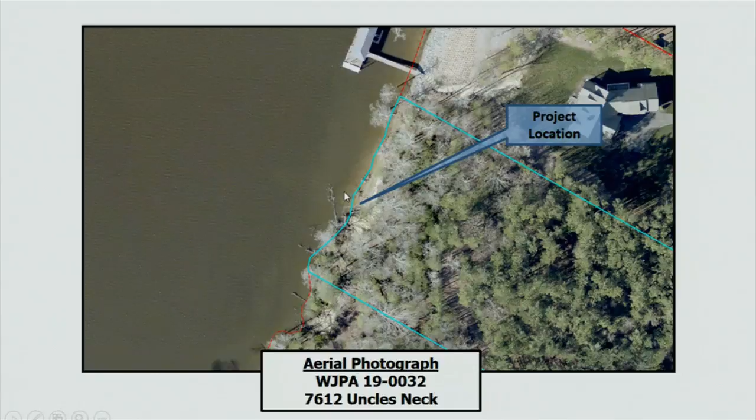Aerial photograph showing the approximate location of the beach nourishment with breakwaters occurring here in the water. Topography indicating the steep nature of the bank with excessive erosion occurring on it, and the floodplain as it occurs on this property.

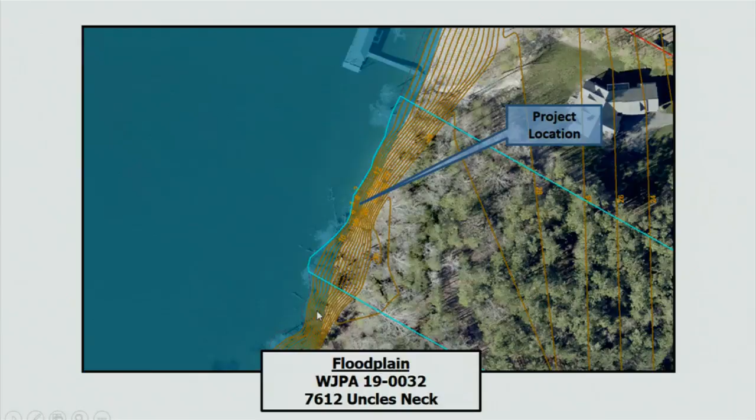This cross section of the beach nourishment and breakwater shows the essential project limits.

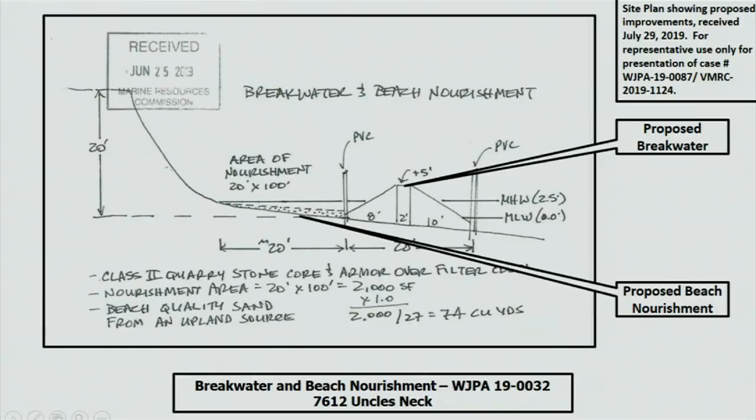Some site photographs, approximate area of the beach nourishment. Here you can see a snapshot of the extensive erosion on the bank as the current conditions lie.

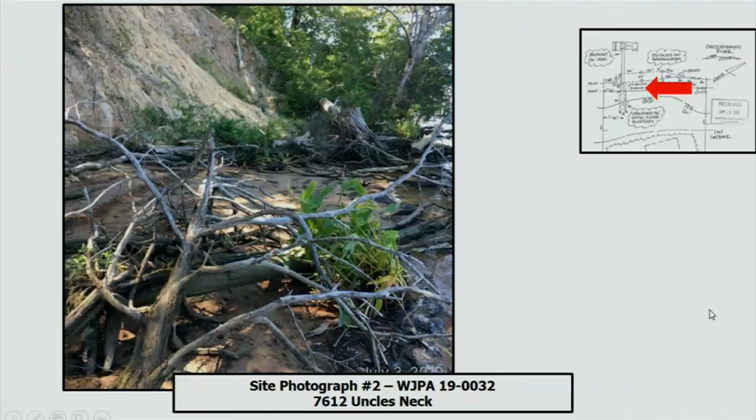This is part of the breakwater, I believe. Further out, also this PVC pipe indicating the breakwater, and this one here also with vegetated wetlands occurring here.

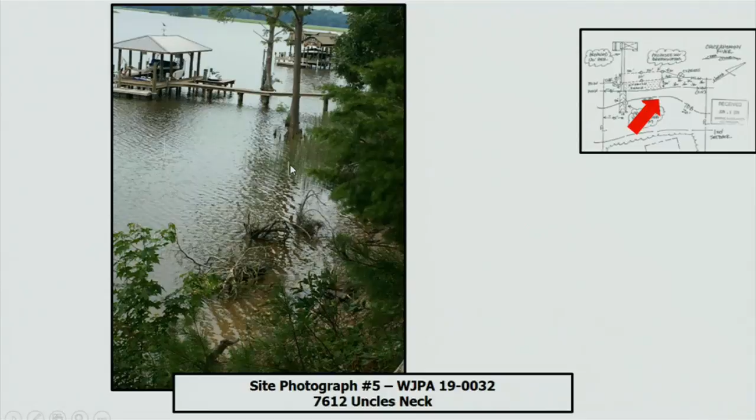From the upland bank, looking down on the vegetated wetlands, here's PVC pipe. And looking towards the project as a whole, very well illustrating the erosive nature of the bank and need for beach nourishment and a breakwater.

Again, staff does recommend approval of this project, given that all other necessary federal, state, local permits are required for the project. That a surety in the amount of $450 shall be required to guarantee the no net loss of wetland policy and the mitigation plantings.

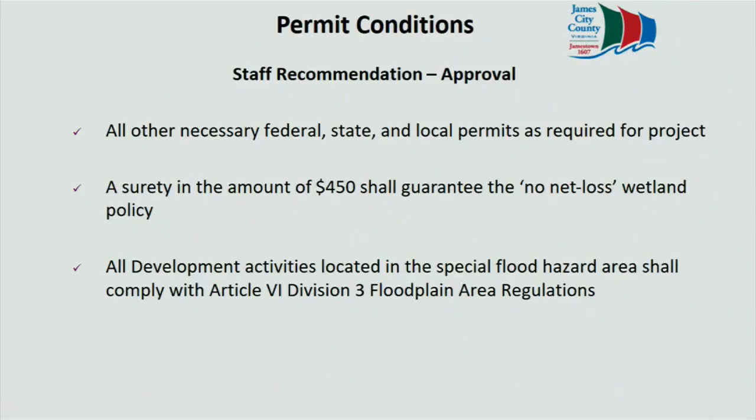That all development activities located in the special flood hazard area shall comply with Article 6, Division 3 floodplain area regulations. That the wetlands permit for this project shall expire on August 14th, 2020 if construction has not begun, with a request for an extension to the permit written and requested no later than July 3rd, 2020.

I'd be happy to answer any questions that the board may have at this time.

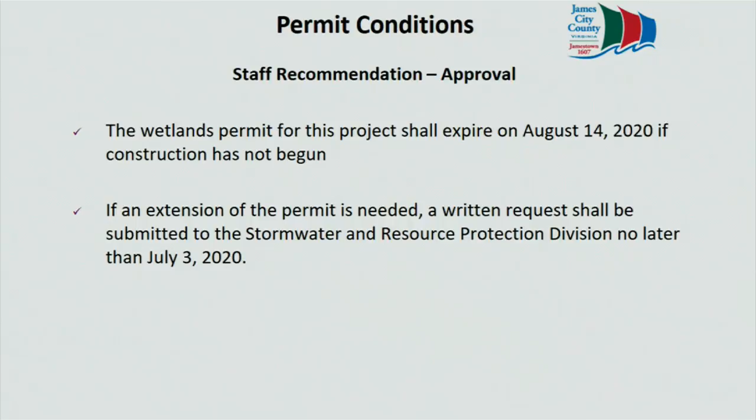Questions? I have one. Are they going to put a pier or access to the breakwater? Access to the breakwater? Yes, or over elevated access so they can walk, put a boat out past the breakwater.

Yes, they will. And the pier will be located right here. And access to the pier will be heard before the board in the Chesapeake Bay portion of this meeting.

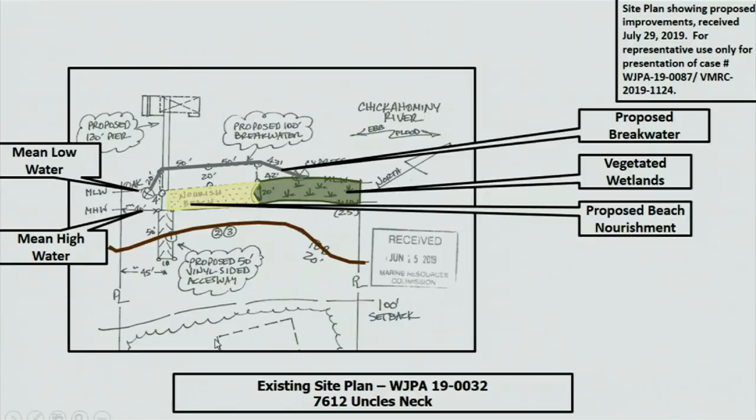So the portion of the pier that's going over, will not be going over the wetlands, and that area is not being considered when you compute the whole amount of wetlands that will be planted. Is that correct? That is correct. Okay, thank you.

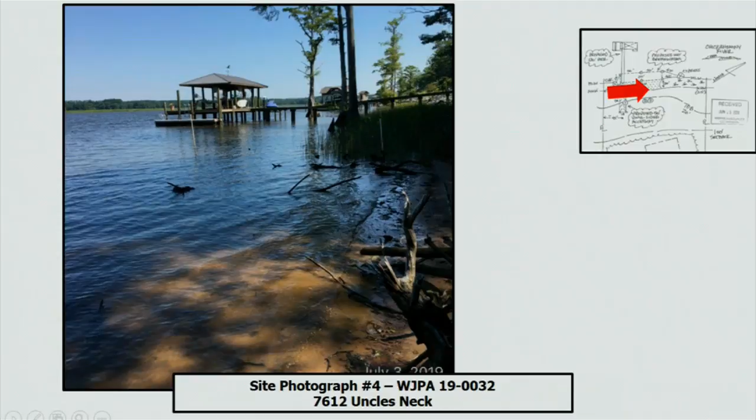The concern that I had is that the application as presented shows 2,000 square feet of subaqueous encroachment. Clearly, because of the vegetated wetlands, there's an intertidal component here. So are we saying that was the 70 or 30 feet, 30 square feet? I don't know the answer to the question. There's a little bit of a conflict between what the application states and what we're seeing.

When we went out and looked at this, I believe we went out at lower tides, however it may have been slightly higher, and we calculated that number at about 30 feet. We were a little unsure with the PVC placement as to where the breakwater would go, so on the assumption that it went further into those vegetated wetlands, we chose a safe number of 30.

As staff, we would like to put it out there that if we could amend the conditions so that mitigation plantings or surety could be determined closer to the time of construction - we saw vegetated wetlands come up when staff went out, but not when the applicant came out - so if that would be something the applicant would be interested in, staff could be amenable to that. So determine the mitigation requirement just prior to construction, based upon the presence of vegetated tidal wetlands. Thank you.

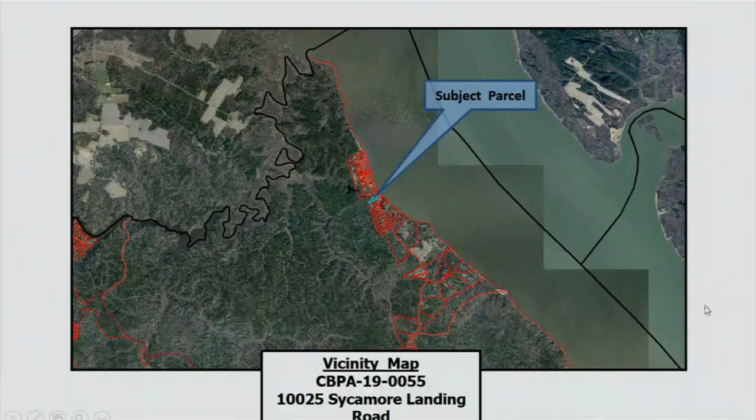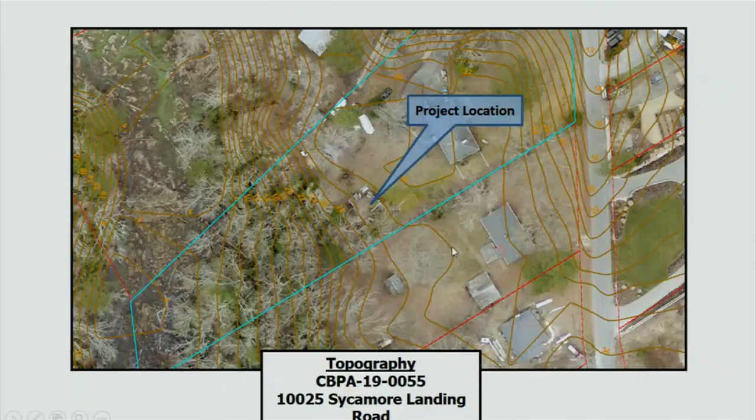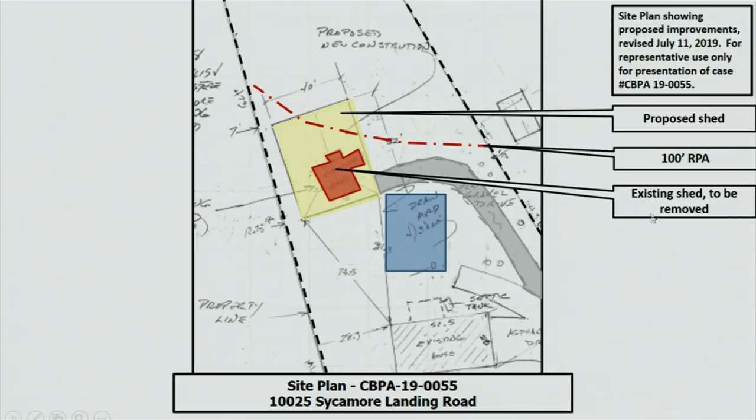Aerial photograph showing the approximate project location for the proposal with the existing shed to be removed. The topography of the site indicating the slope downwards towards the rear of the property. The resource protection area as it does affect this property. The revised site plan showing the shed and the impacts to the resource protection area, which can be found here in red, and the proposed shed here in yellow with the existing shed to be removed in orange.

Existing gravel driveway, which will be located outside of the RPA, and the existing drain field, which prohibits the shed from being brought up any further. The applicant has also moved the shed farthest to the side of the property, which should not extend into the building setback. A side view of the proposed plan.

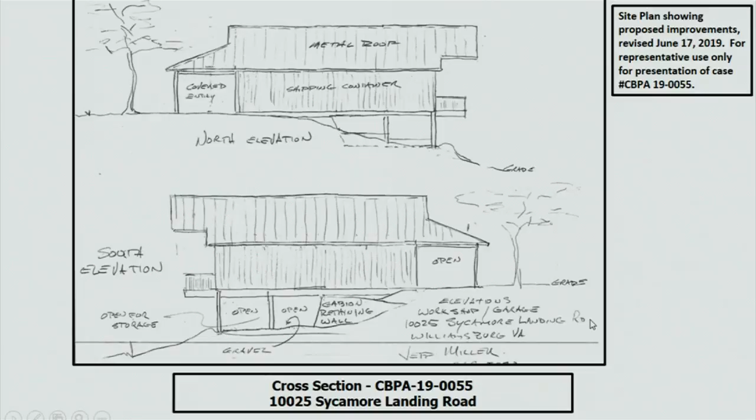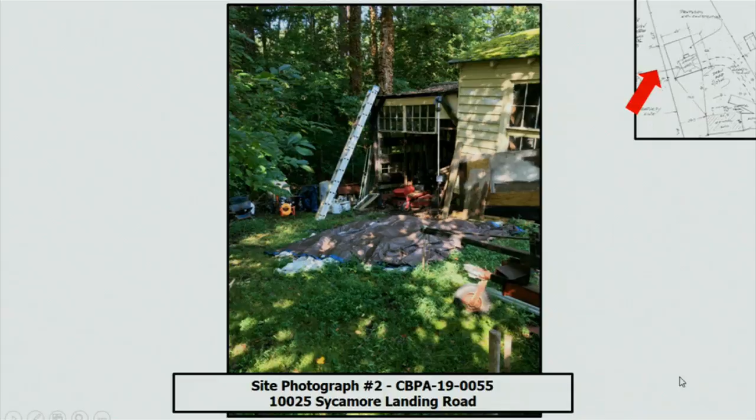An elevation drawing with the drip line surrounding the structure. Site photographs showing the existing shed and the approximate location where the proposed shed will go. Towards the rear of the shed and the storage area. Looking back towards the front of the property.

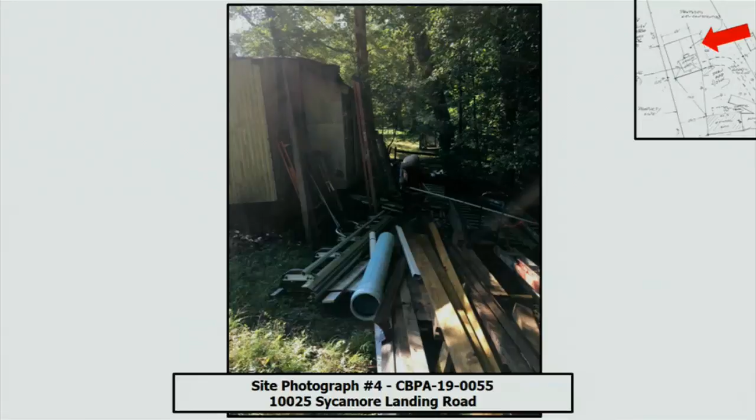Again, staff does recommend approval of this exception request, given that all other necessary local, state, and federal permits are required, that the applicant submit a mitigation plan congruent with staff requirements, being 1 canopy tree and 3 shrubs, and that the applicant submit an erosion and sediment control plan and land disturbing permit if applicable. A surety of $500 should be in place to ensure the mitigation requirements, and this exception request approval become null and void if construction is not begun by August 14th, 2020, with a written request for extension submitted no later than July 3rd, 2020. Happy to answer any questions at this time.

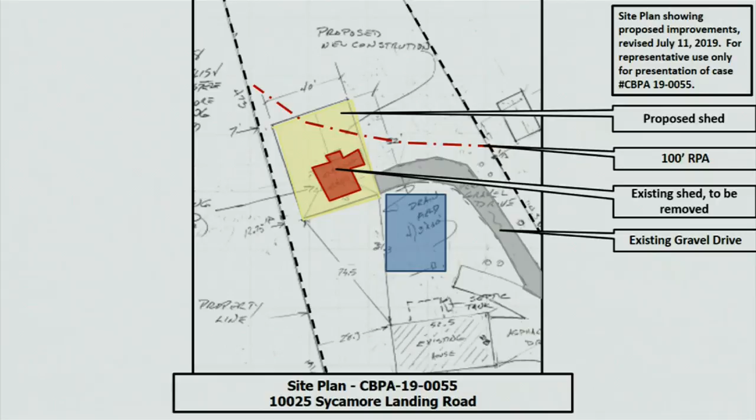Any other questions for the staff? Okay, the public hearing is open on this. Would anyone like to speak on this issue before I close the public hearing?

Any questions for the applicant?

Chairman, I appreciate Mr. Miller working with the board to reduce the impacts. I have no questions. Mr. Chairman, I'd also like to say thank you to the builder and homeowner for working with the board. Thank you. All right, at this time, I'll close the public hearing.

Any discussion from the board? It looks pretty good to me compared. Yeah, much better project. Thanks for doing that.

Okay, can we have a motion? Yes, sir, I'll make a motion to adopt staff recommendation to grant the exception to Chesapeake Bay Board case number CBPA 19-0055. Okay, can we have a roll call?

Mr. Roadley? Yes. Mr. Lukens? Yes. Mr. Gussman? Yes. Mr. Hughes? Yes. Mr. Apperson? Yes. Okay. Thanks for coming out.

Next case is CBPA 19-0087.

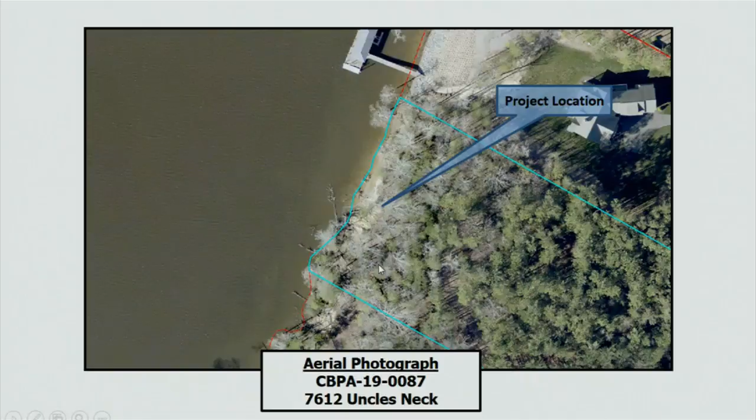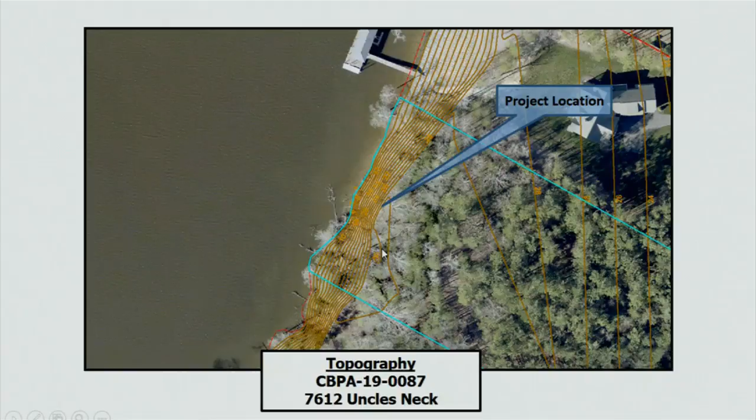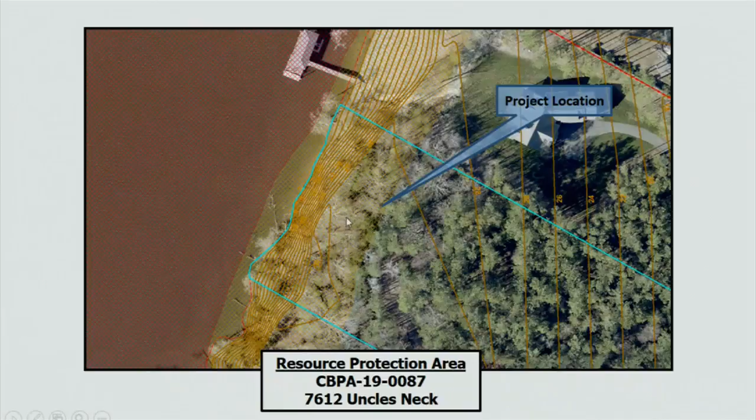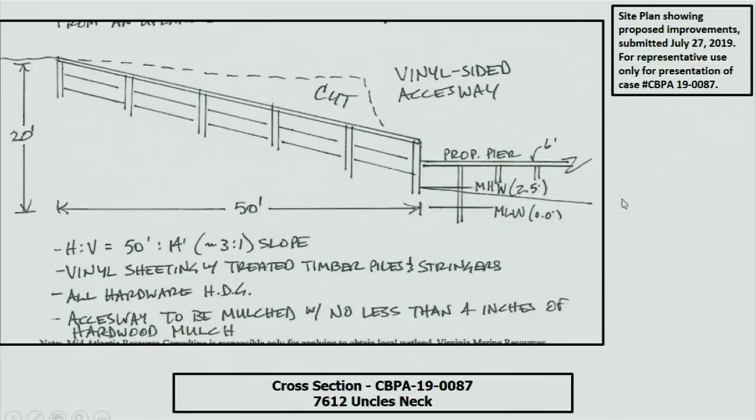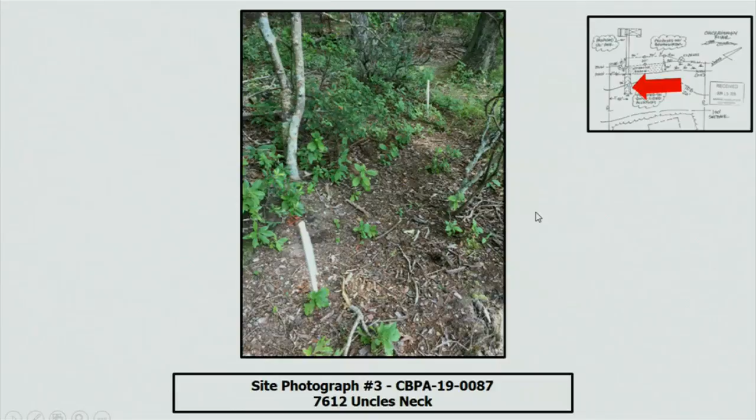Side view of the access way with vinyl siding. The approximate location of the accessway. And from the uplands, approximately where the accessway will start, indicated here with PVC outlined in yellow.

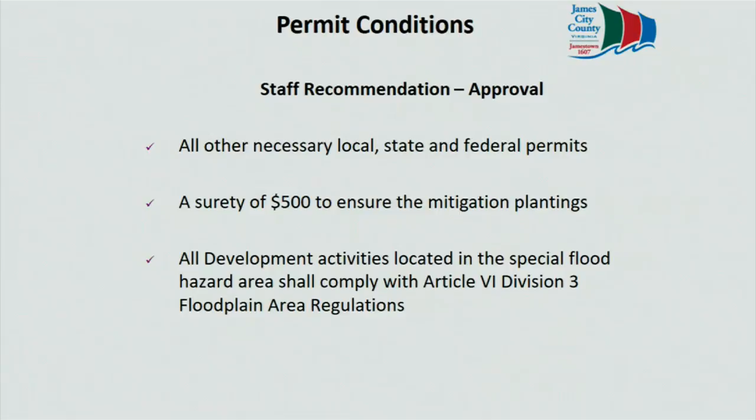Staff does recommend approval of this exception request, given that all other necessary local, state, and federal permits are required. That a surety of $500 to ensure the mitigation plantings be submitted to the James City County Treasurer's Office. That all development activities located in the special flood hazard area shall comply with Article 6, Division 3, floodplain area regulations. And this exception request approval become null and void if construction is not begun by August 14th, 2020, with written request for an extension submitted no later than July 3rd, 2020. That is all, I'd be happy to answer any questions at this time.

Can you just review again, what's the width and the length of the path? Sure. So the length of the path would be approximately 50 feet, with the width being 10 feet.

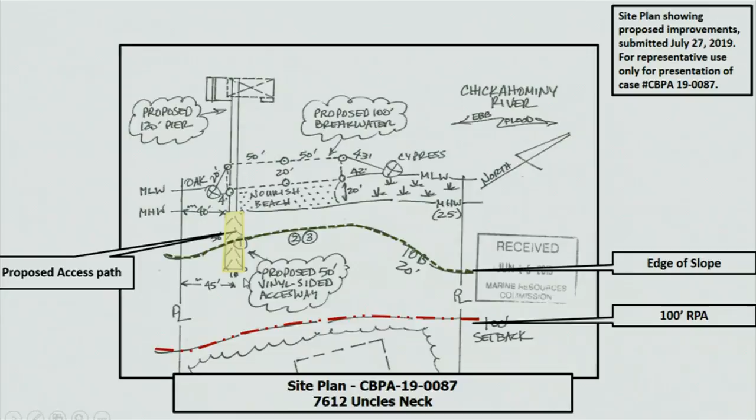I couldn't follow, what's the vinyl sided access way? Sure, I'll defer that question to the applicant, I feel she can best explain the construction of the access way. Will the path be on the ground, or is any of it going to be elevated on piers? It will all be on the ground, as I understand it.

Any other questions for staff? Okay, at this time I'd like to open the public hearing. The applicant would like to come forward and explain exactly what the path is. And I didn't follow - how high is the vinyl going to be? Is the vinyl lining the sides? Good evening, Mr. Chairman, I'm Carla Havens with Mid-Atlantic Resource Consulting.

The accessway, the 10 by 50 foot accessway, is the only portion of the bank that's going to be cut. And the vinyl siding is the vinyl sheeting that is used for bulkheads. So it comes in 2-foot sections, it's tongue and groove, and instead of sticking it along the shoreline, it's going to go perpendicular to the shoreline, and it is going to line the access cut from the upland down to the pier.

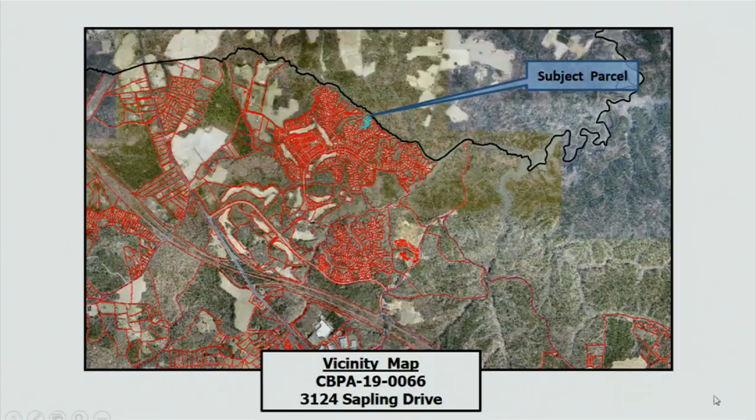I'll divert your attention to the screen for a brief presentation. Again, the applicant request is to construct a retaining wall on property located at 3124 Sapling Drive within the Bent Tree section of the Stonehouse subdivision. An aerial photograph of the property and the project location here in the rear of the property.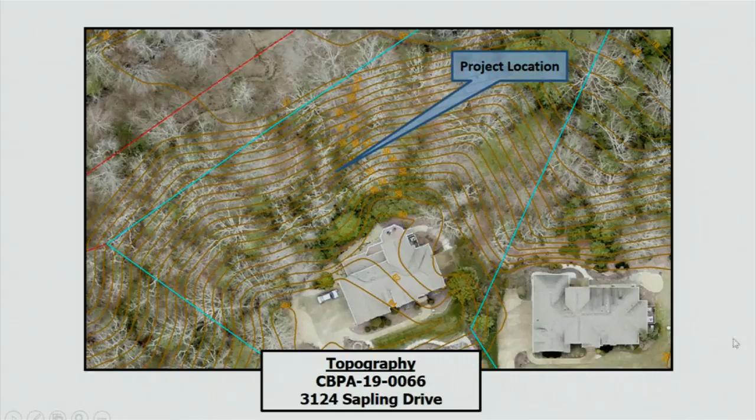The topography of the property and the fairly gradient slope in nature, and natural open space as it affects the property, with RPA overlaying into it.

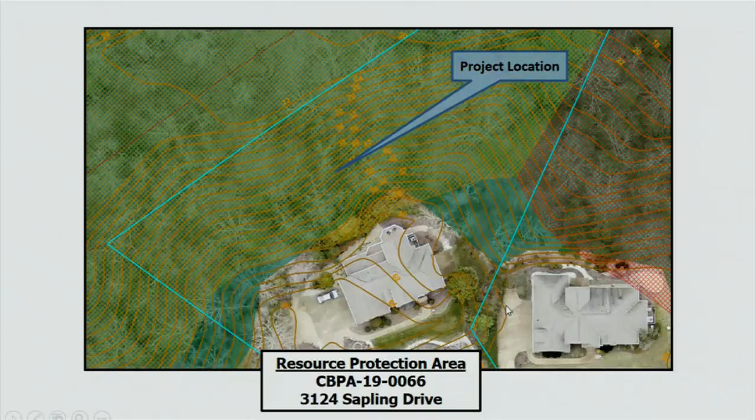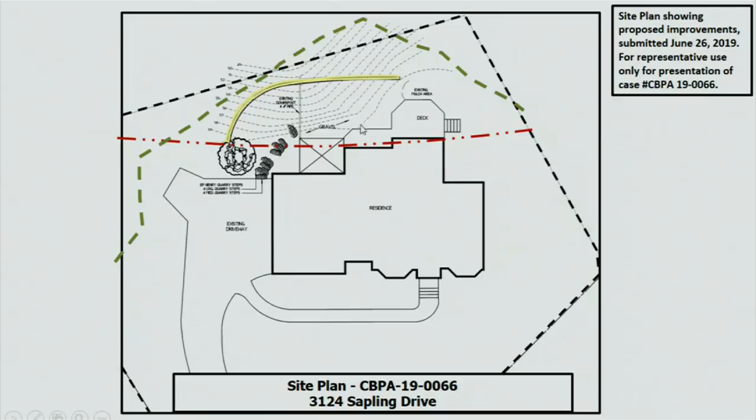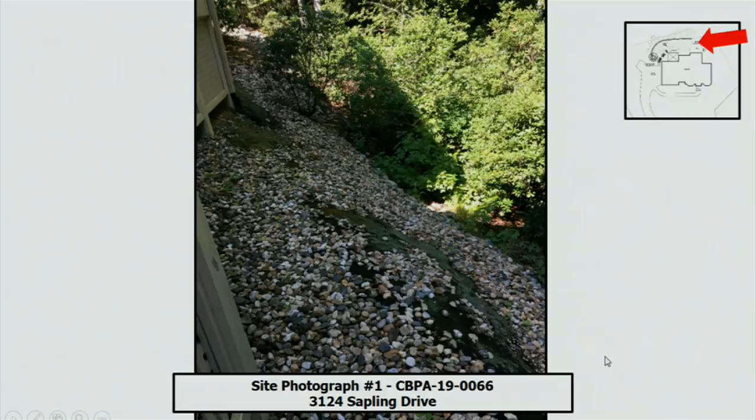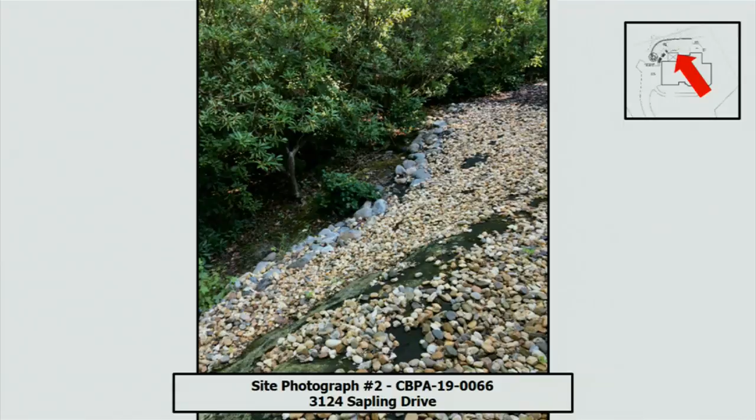The site plan for the proposed retaining wall extending into the resource protection area behind the deck and wrapping around towards the driveway. Contour is here exhibiting the extreme slope at that particular area, which can be visualized here with these pictures. Here's the approximate location of the middle of the retaining wall, outward looking the rear of the property. And showing the erosion and the mitigation efforts to combat the erosion with rock and tarp being laid underneath.

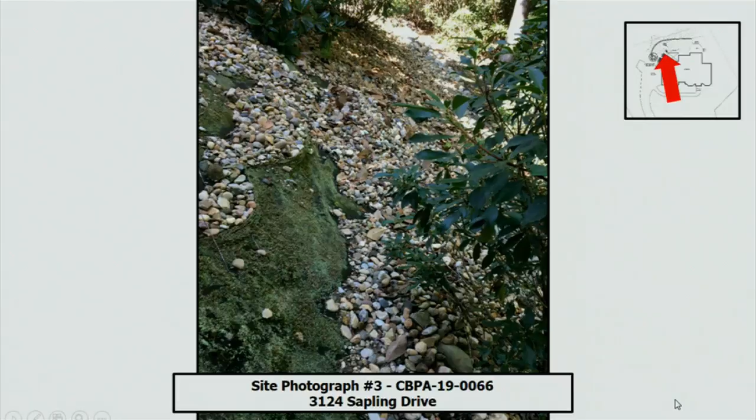Staff does recommend approval of this exception request, given that all other necessary local, state, and federal permits are obtained, that the applicant provide a mitigation plan equating to 1 planting unit with a surety of $250 to ensure the mitigation planting is installed, and that this exception request become null and void if construction is not begun by August 14th, 2020, with written requests for an extension submitted no later than July 3rd, 2020, 6 weeks prior to the expiration date. Thank you, I'd be happy to answer any questions at this time.

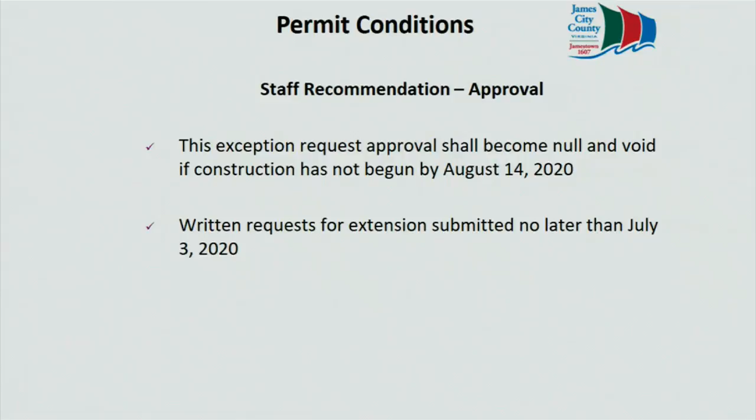Can you go back to the diagram that showed the RPA? When you went through that, is there a conservation easement in there? There is, the conservation easement is outlined here in green. It's approximately correct, I do not believe that the retaining wall will extend into the conservation easement. Okay, that was going to be my question.

All right, thank you. Any other questions for the staff? Mr. Long, I assume this topo, excuse me, is this the pre-existing topo, or is this the existing topo? I would venture to say this is the existing topo. The slope at the property is very significant. When I made a visit to the site, I found it to be slightly different than what we had in the county's topo, and to be a little more severe.

So in your pictures, you showed the gravel and what looked like filter fabric that had been laid on the bank, and then at the toe of the bank was an existing stone cribbing to kind of hold the gravel in place. Yes, that is correct. So where would you say that stone is relative to that site plan that you just showed? Let's say the stone is approximately in this area.

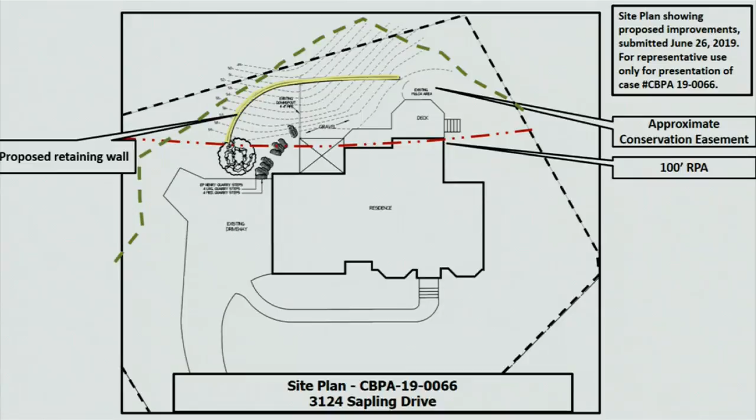Thank you. When they put the retaining wall in, will there be any need to backfill? I believe so, I'll let the applicant ensure that that is correct. And so you don't know how they would go about getting to where they would have to place the backfill? I will defer that question to the applicant as well. Thank you.

Any other questions? All right, at this time I'd like to open the public hearing. Would the applicant like to come forward and state their name for the record? And we've already heard a couple questions that we have, if you could answer them. Good evening, my name is Aaron Williams, I'm with the company Williams Landscaping Design that will be installing the project for the homeowner.

And I can definitely answer the question about the backfill. If I could back up to the purpose of it real quick first, when you saw the photos of the river rock, those are 3-inch to 5-inch river rocks that were back there. My understanding is when the house was originally built, that area was somewhat level coming off of the foundation and then dropped off steeply. Over time, it has eroded to the point where they used to be able to walk around the house, and now it's almost certain that you cannot walk around that house without holding on to something. It's definitely eroding away. And the big concern was one of the piers for the deck is slowly exposing the footer on it, so that's kind of an alarm bell.

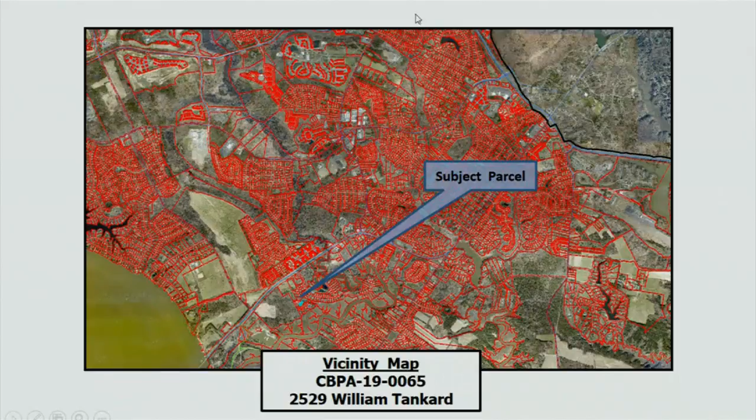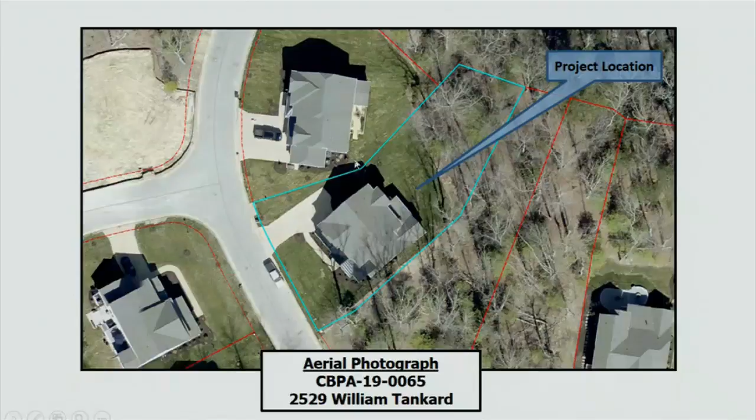I'll now present a brief presentation. The applicant requests to construct an in-ground pool on property located at 2529 William Tankard within the Landfall subdivision. Here is an aerial photograph illustrating the property and the approximate location of the pool. The topography is fairly flat in the rear of the property.

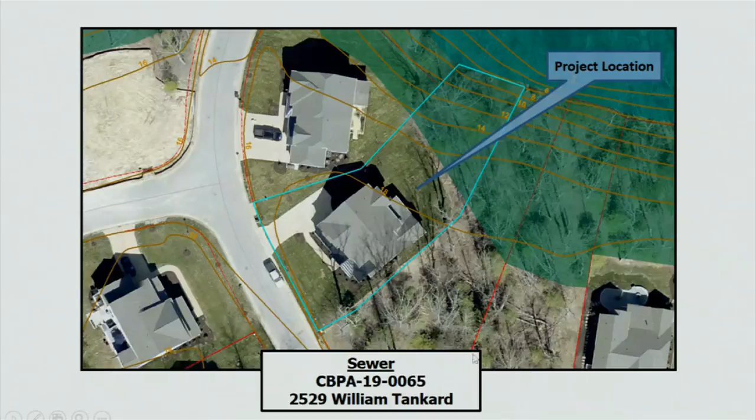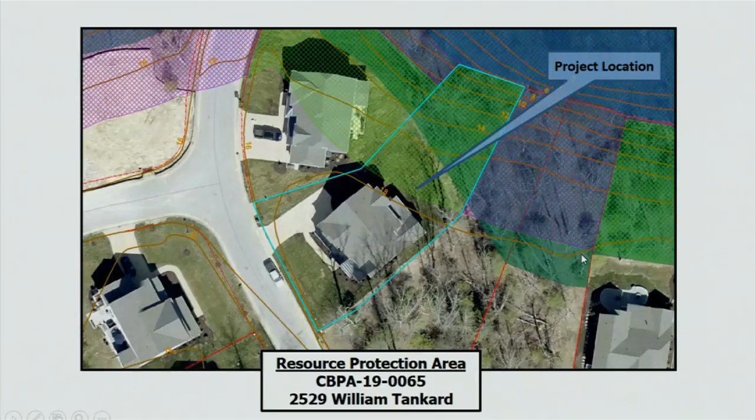The entirety of the area where the pool will be located is currently maintained in vegetated turf.

Staff does recommend approval of this exception request, given that all other necessary local, state, and federal permits are obtained. A surety of $250 is put in place to ensure the mitigation plantings, and this exception request becomes null and void if construction is not begun by August 14th, 2020, with written request for an extension submitted no later than July 3rd, 2020. I'd be happy to answer any questions the board may have at this time.

Could you go back for me and show me the RPA line? I was confused about what the line was that was cutting across.

What's the RPA and what's the scalloped line? This is the original plat that was proposed for the original construction of the house. At the time, these were the limits of clearing. However, the applicant came in at a later date and received approval to clear further towards the conservation easement.

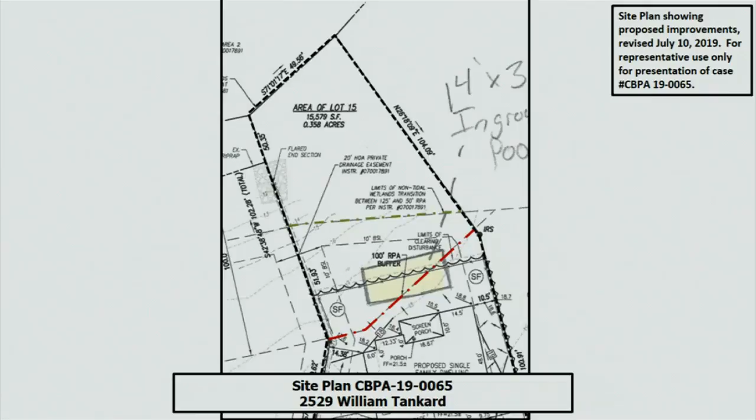Mr. Long, the site plan that we have in our document, which I think is the current one, the current proposal - if I'm following that red line, the angle and the turn, a significant amount of the pool has now been moved closer to the house and out of the RPA. Is my site plan correct in what was included in the package?

There's an actual engineered drawing of the pool. Yes, I apologize, that is the correct site plan, which is why the majority of the pool is located outside of the RPA. All in the backyard, right? Yes, sir.

Any other questions for the staff? Mr. Long, do you know how they're proposing to handle backwashing and discharge of water from the pool? I am not aware, unfortunately. I have not raised that question with the applicant. Is it a saltwater pool or a chlorinated pool? I believe it's a chlorinated pool.